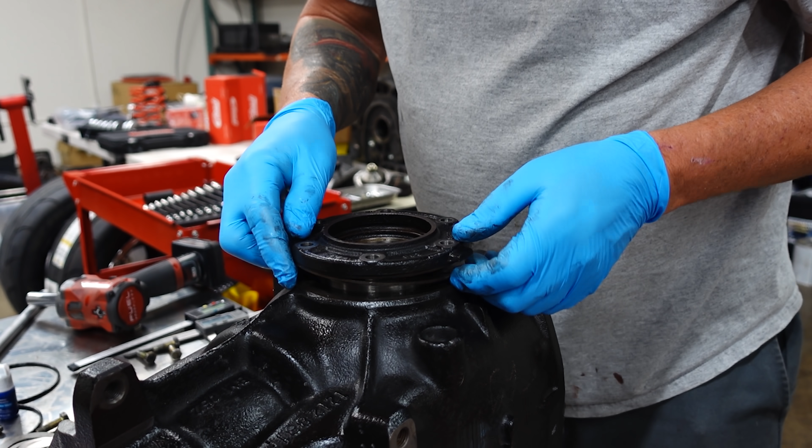You know what he could use there? He could use a shim. No, he could use even more shims.

With only 14 days, 2 weeks until this absolutely insane race, I've got a bit of a conundrum. Thankfully, I've got a solution. This is a steel ring, and it belongs right there.

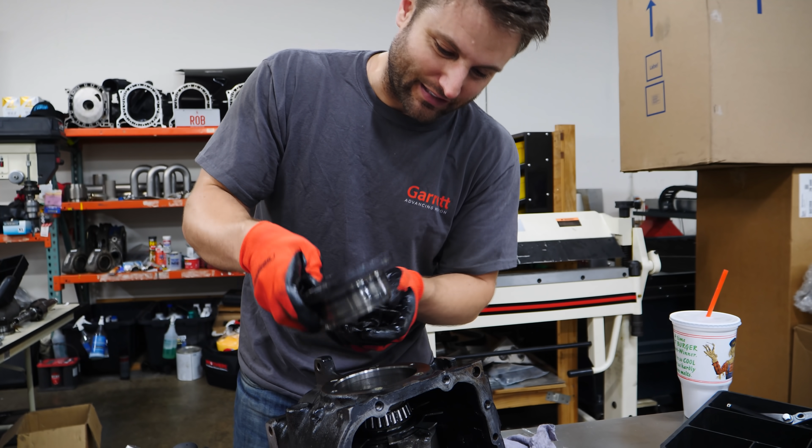These are shims used to position the things inside of the front differential. You're putting pressure on that race, on that bearing. Ooh, look at that. It's a baby.

I made a post online asking if anybody had any BMW shims for this. They didn't, and there's one kit over in like Yugoslavia. I don't even think Yugoslavia is really a country anymore. It's gonna take 2 months, too late.

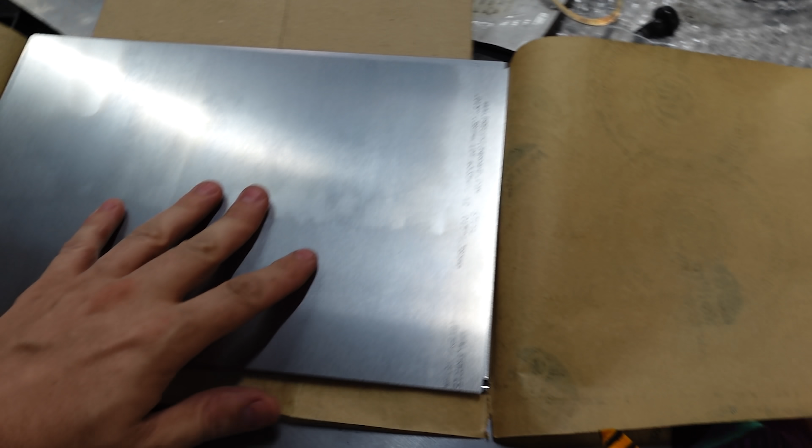So I went out and bought steel shims, just raw material. Slightly thinner, and you can see it's turning into paper as we go. We are going to take all of these and turn them into this.

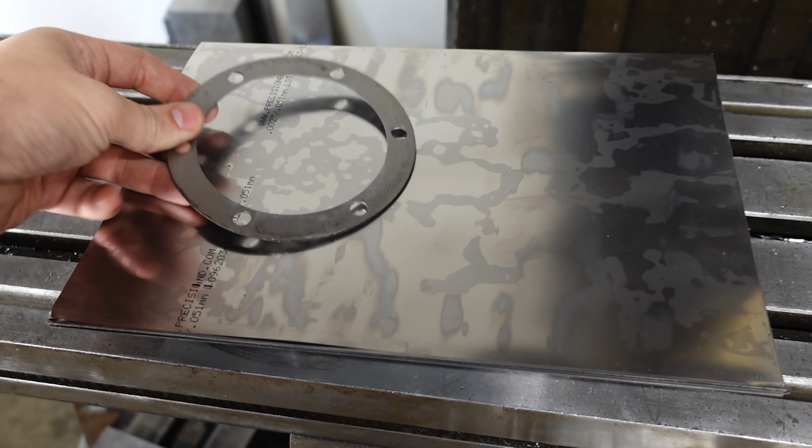I can actually cut all of these in half and make 2 of each. I paid $30, I'm going to use my $30. I mean, I have a $30,000 machine and I'm worried about saving an extra $15. That's why I can afford a $30,000 machine.

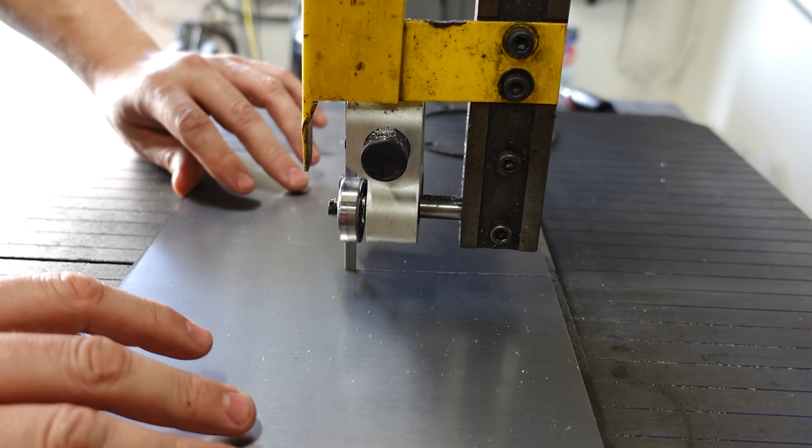I put the really thin ones in the middle. That was just a rough cut, and look at how close I was to the 2 sides being the same width. I'm actually really proud of that. We've got double the number of shims, and they all have plenty of space for me to clamp.

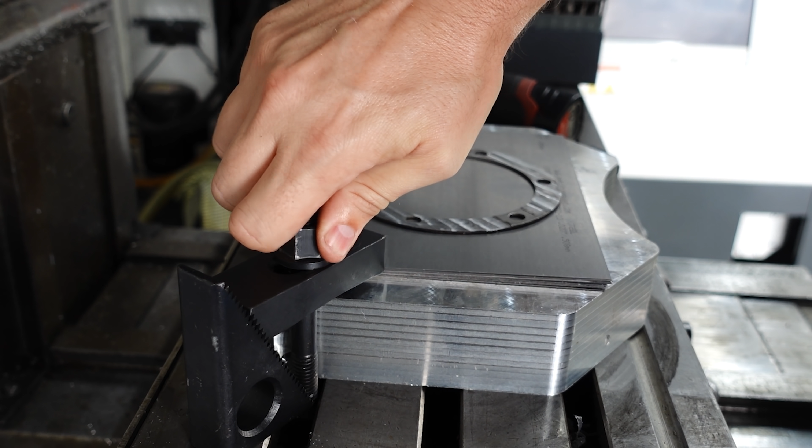Here's where the whole operation gets really interesting. We're gonna drill a hole somewhere in the center. It does not matter, the hole itself starts the process, not the ring. We don't have to set it anywhere.

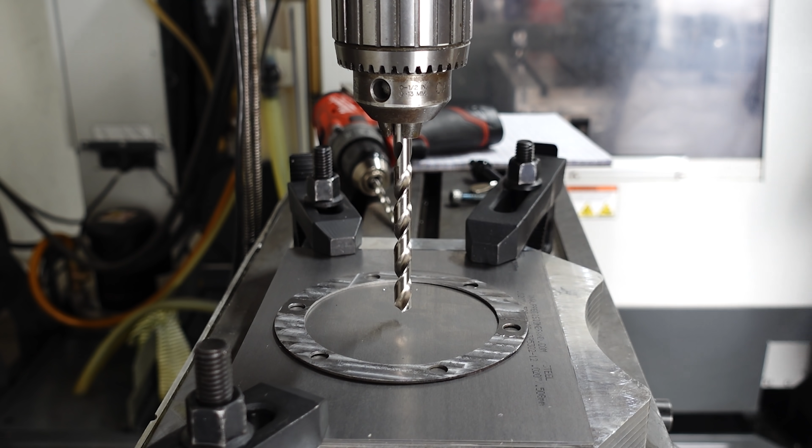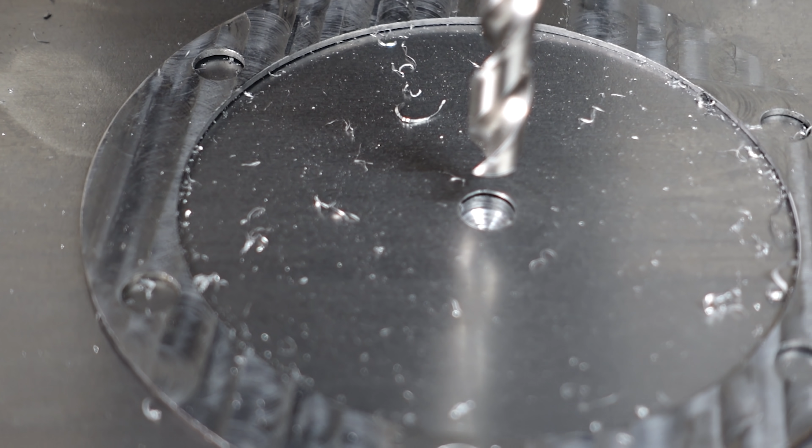So we need to drill the total distance. We will drill basically a cone into the aluminum. That went perfect. There you can see the darker steel and then the lighter aluminum right in that center hole.

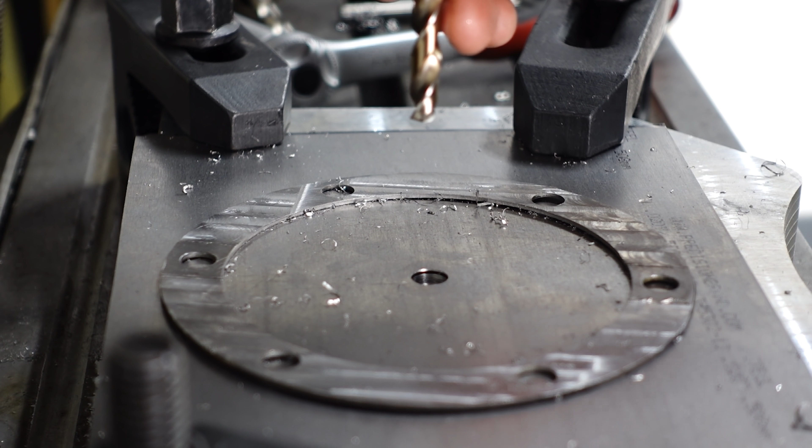For this step, we're actually using a 6.8 millimeter drill bit because we can get these threads really tight without any issue, because it's aluminum, not steel. And it's not in a CNC machine going 7,000 RPM where you catch the bit on fire.

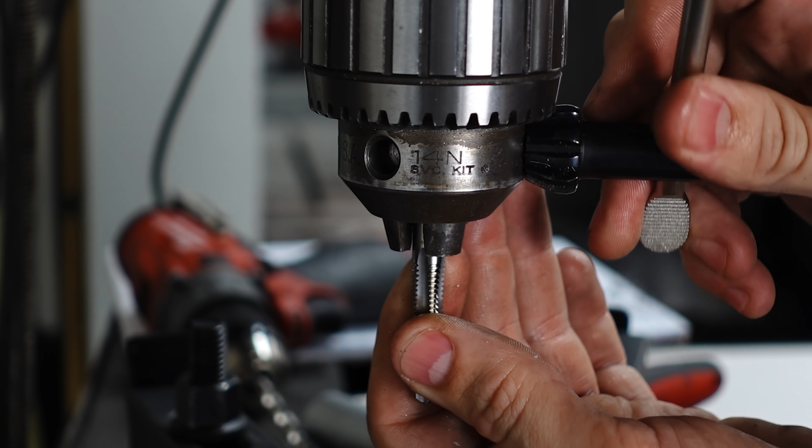This is something I've wanted to do for a while. This is a tap, because this has a quill, so this whole thing can be pulled down by itself. See how it can do that? You can actually use this to tap.

We're gonna go very, very slow, do a couple of rows, figure out where it's gonna go from there. But I'm curious to see how this will work. I wouldn't do this if this wasn't aluminum.

So we'll bring it back out. I cannot believe that worked. Try this.

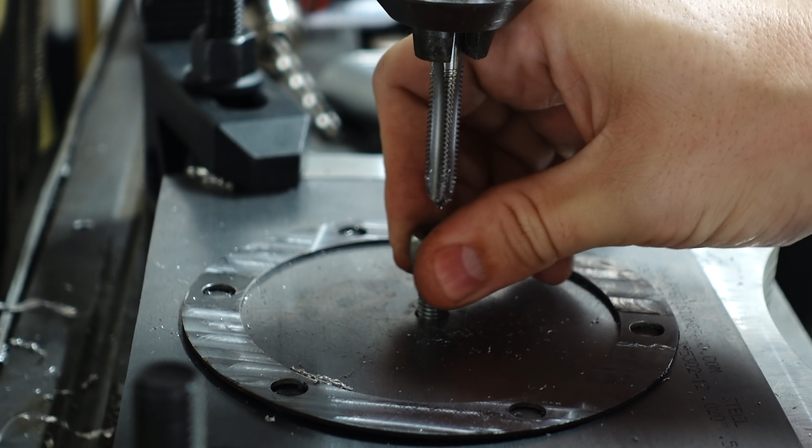That's just amazing. These are the bolts I want to use inside of this because the heads aren't wider than the area we need to cut, which makes working on it easier.

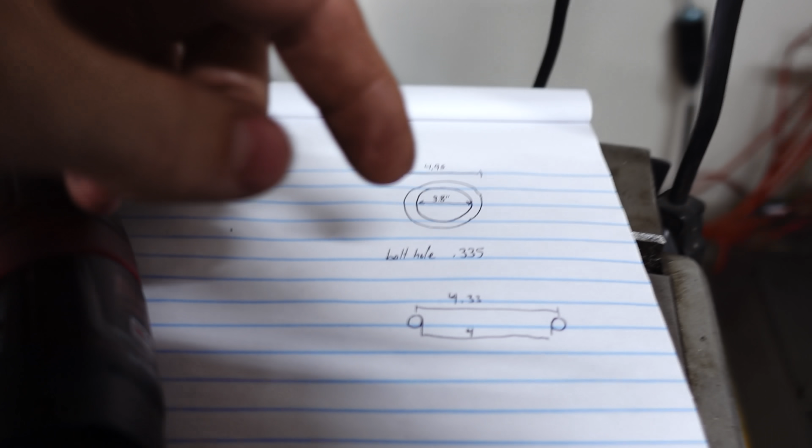So that's done, that's what we'll use to position on the big mill. But also we now know that from center to center of each of the holes, it's 4.33 inches.

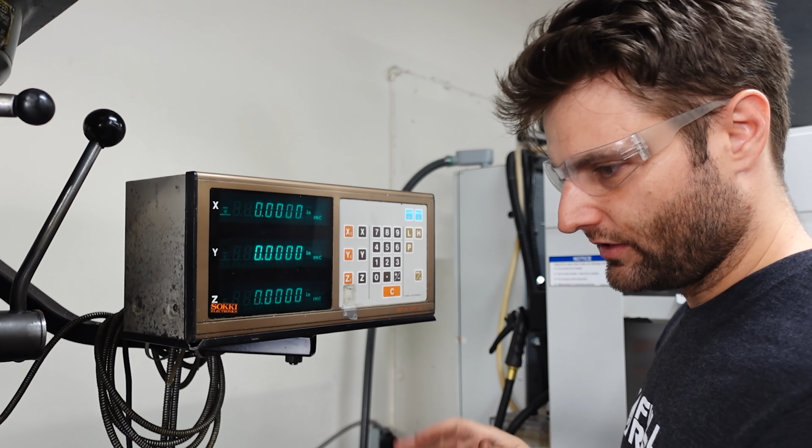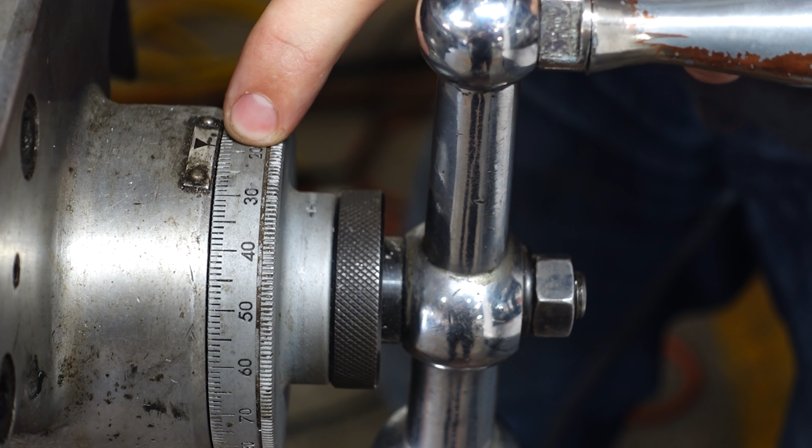So it is centered to the center, and we need to move 2.165 inches either side. So we're gonna have to do it by hand. We're gonna spin this 10 times to get us 2 inches. We're marked at 20, so we're gonna do this 10 times, okay?

1, 2, 3, 4, 5, 6, 7, 8, 9, 10. We need to add the 165 to the 20, so we'll go to 185. Go like that, that's making sense to me.

There we go. Time to swap to the smaller bit.

You guys get to watch how this handle just sinks.

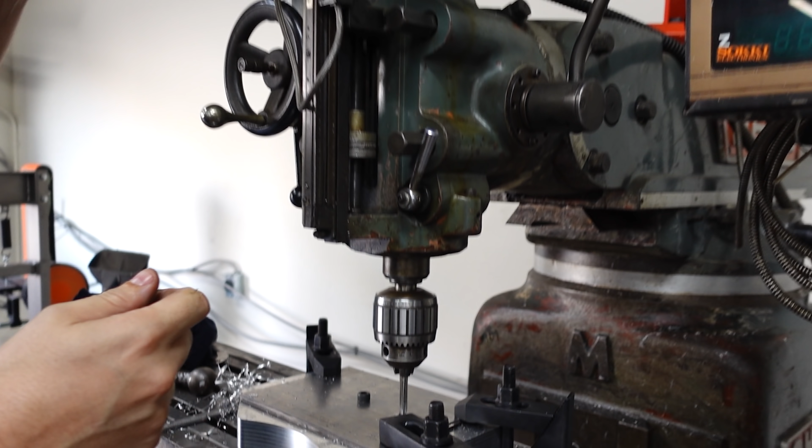It's not an angled tap, so it's not pulling the threads out or pulling the metal out as much as we'd like.

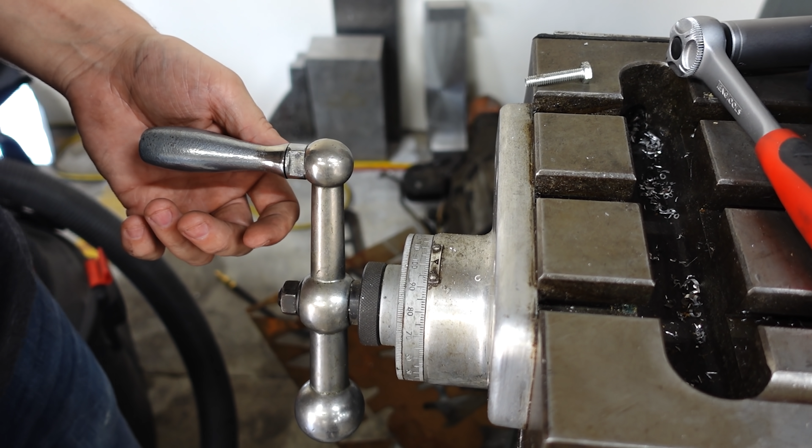10. But here's the real test of my hand jobs.

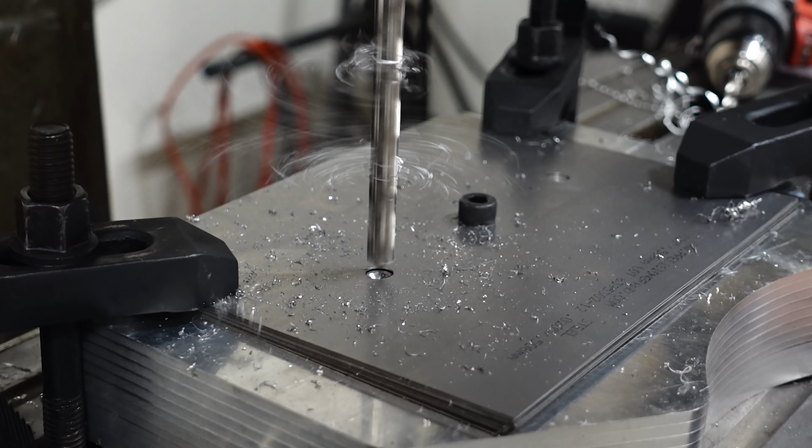I think that's a winner. So doing this on a manual machine is going to make my life a little bit of a living hell.

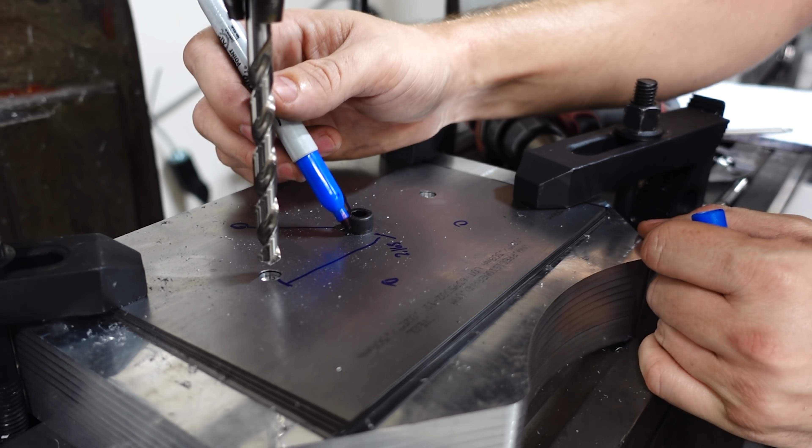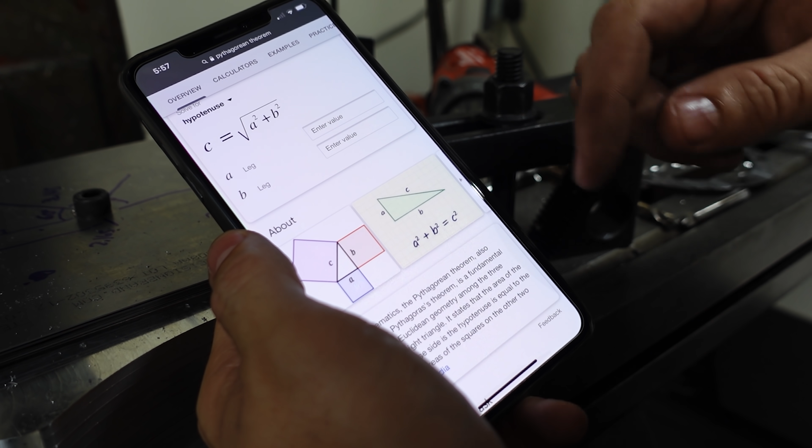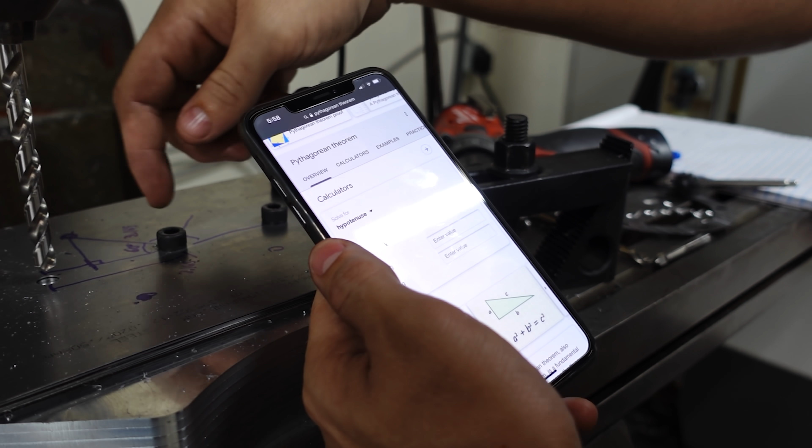Even though this is a circle, it ends up being a triangle. We have to do this, or we can also use sine, cosine, which we will need to do to figure out the heights of these. We're going to cheat - that's the ring that we're going to have to cut with the CNC machine.

It's 2.165, that's where that point's going to be. This is why we're cheating right now. We're simply going to tell it to bring it down, be at a right angle. We just need to move over 1 inch and 83 thousandths, up this way 1 inch 875.

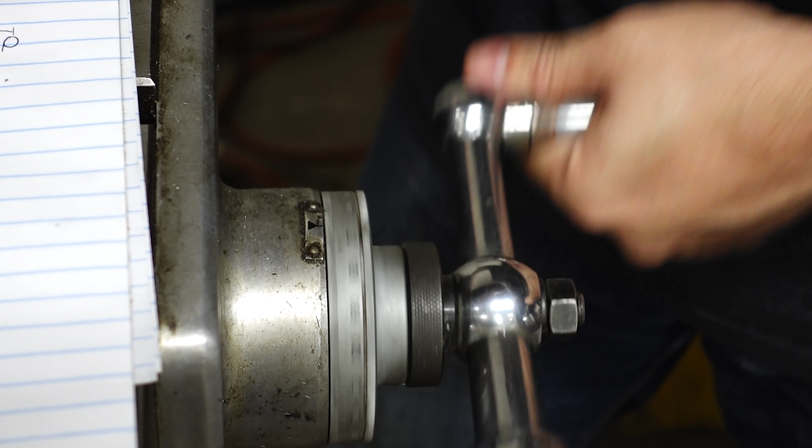1, 2, 3, 4, 5. From those 2 points, that's pretty damn centered. 1, 2, 3, 4, 5, 6, 7, 8, 9. Just roughing it out, 2.161, 2.165 - that's right where it needs to be.

Baby kitty, there's 2 baby kitties. Come here.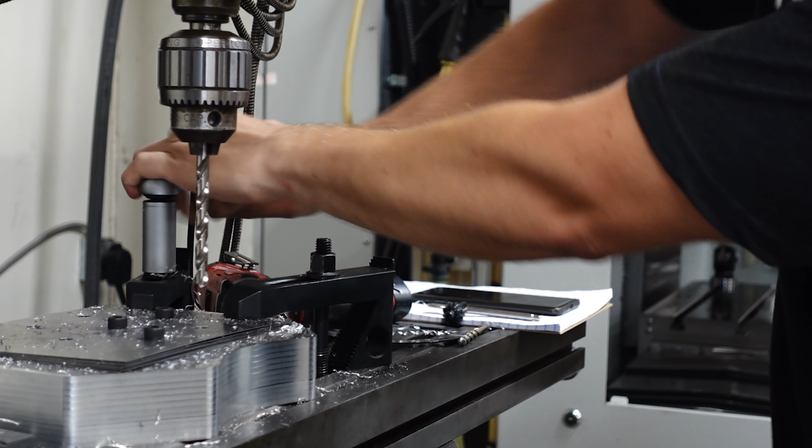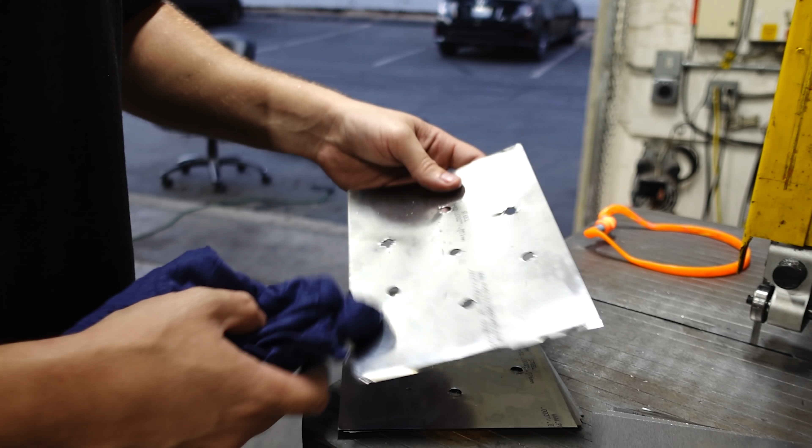Let's see if my holes make sense. The really thin one took a beating - you can see they started to pull through because I didn't have the bolts tightened enough. But I doubt we're going to need 0.002 of an inch.

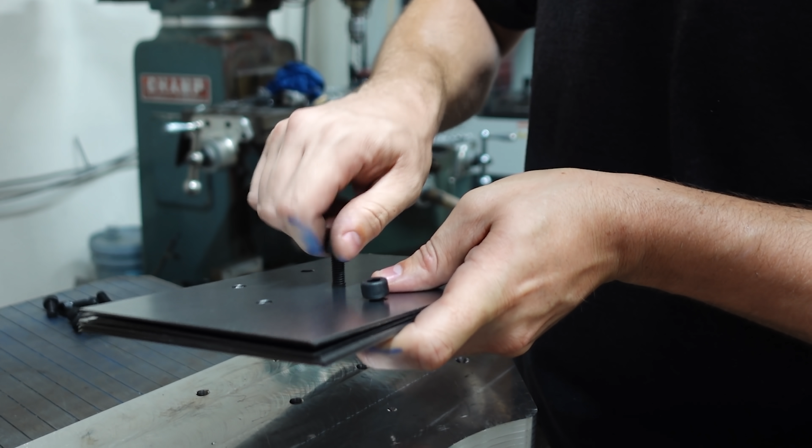The middle one - those threads turned out perfect. We're gonna try just 3.

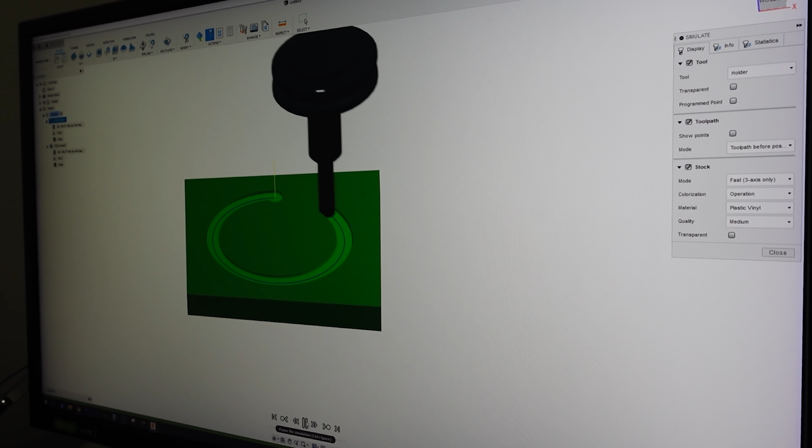This is just straight up a jig to make more BMW shims. This is the next step, a donut. We're actually gonna have the machine go in - I'll show you. So it's gonna go around, go deeper, and because it's steel, we're going very shallow depths. This outside piece is gonna do the same thing.

It's time to use the CNC machine. I am a little nervous, and the reason why isn't the machine itself - it's steel. This will be the first operation I've done that's actually milling steel, not just drilling it.

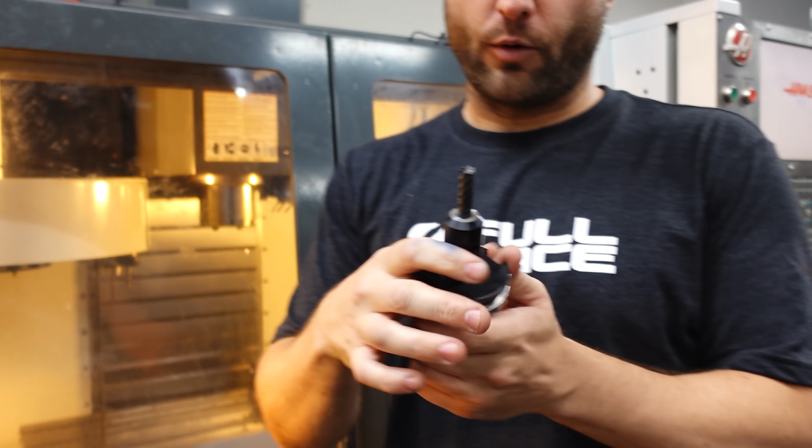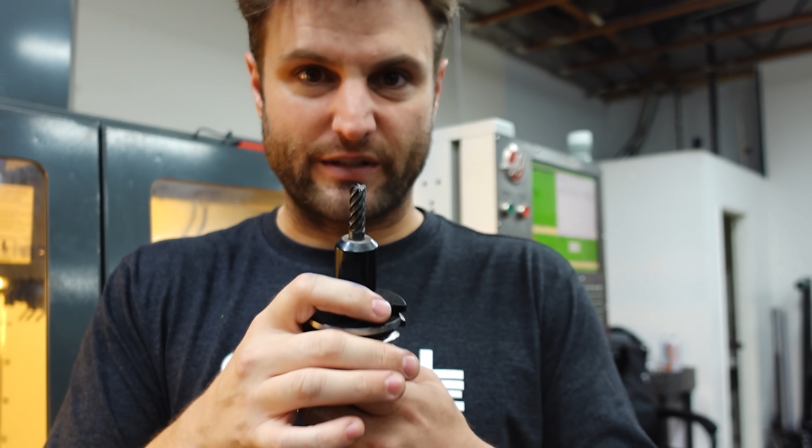We've got this tool here, I'm hoping it's the right tool. We'll find out together - I'm gonna leave whatever happens in. Steel tools tend to have more than just the 2 flutes, as they call them. This has 6. We're gonna go about 1,000 RPM, so very slow, and I looked up how much meat we should basically be taking off per cut. We'll see if that actually works.

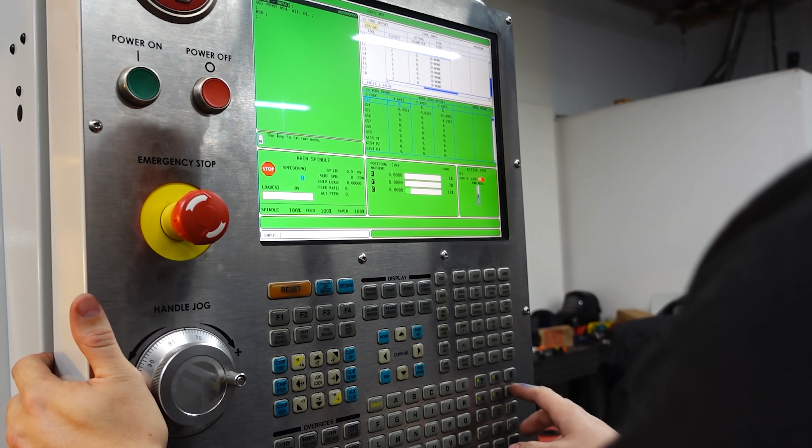We have our newest tool in the system, an end mill, number 4, 6 flutes, length I will say 4.5, diameter I know that's actually 0.37.

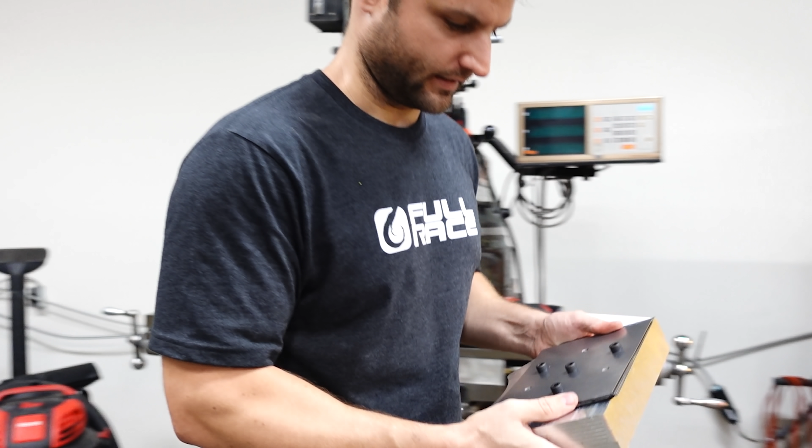Make our little creation here. Doesn't matter where, doesn't matter the rotation, because again these are circles - the only thing that matters is finding the center.

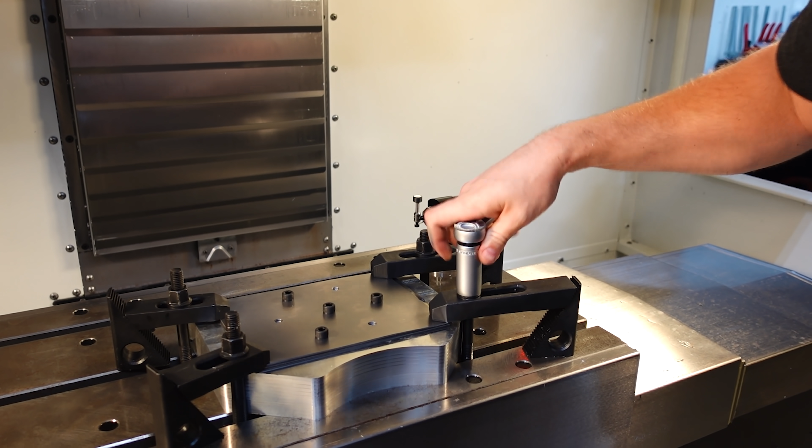Like CNC fail videos, it picks up from here, stays this height, and then clink - just breaks the tool right off. This is pretty much bolted to the table. Take the bolt head out because I don't want the ruby tip here to go into the bolt head and think that it's on the surface and then mess itself up.

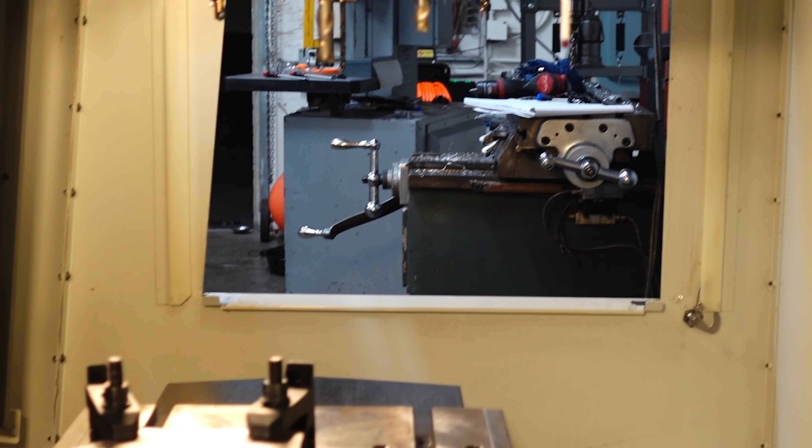We're gonna take these little pegs, fit the tightest one in there, and then tell it to hit there and then measure off of that.

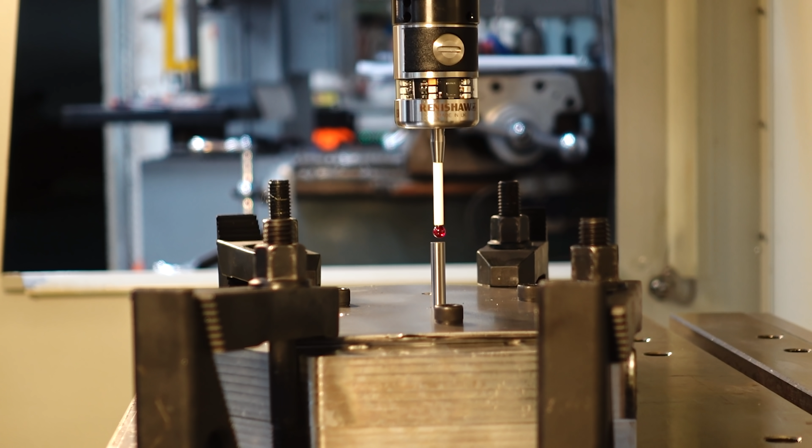That's left, right, forward, and backwards, but not height. We don't want to start cutting from that height.

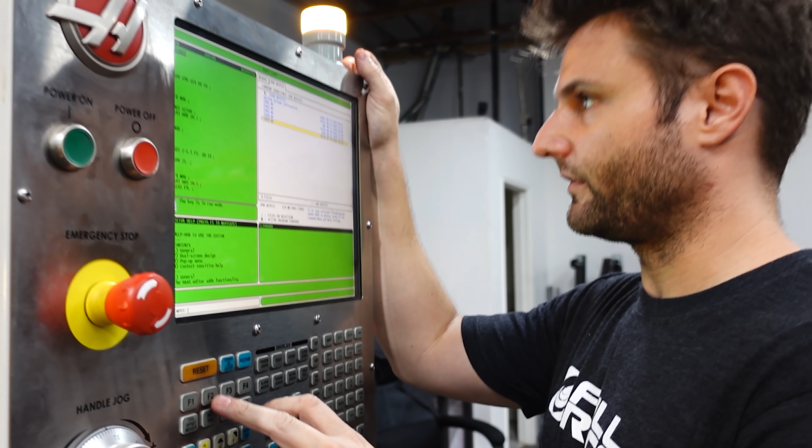We're gonna go put this back in for safekeeping. On here is the secret to it all - it's the code, ready to copy that file to memory.

Now it says grab 211, get the spindle going to 1000 RPM. It's not like matrix code for me yet. This is the first time I've ran CAD from the machine and not written it myself. Okay.

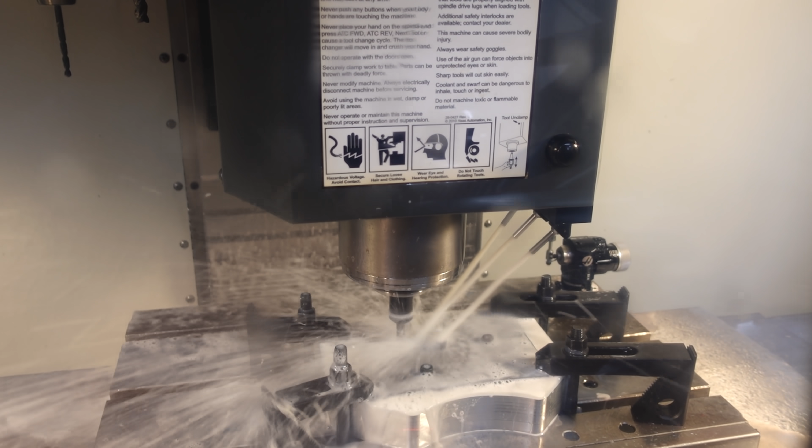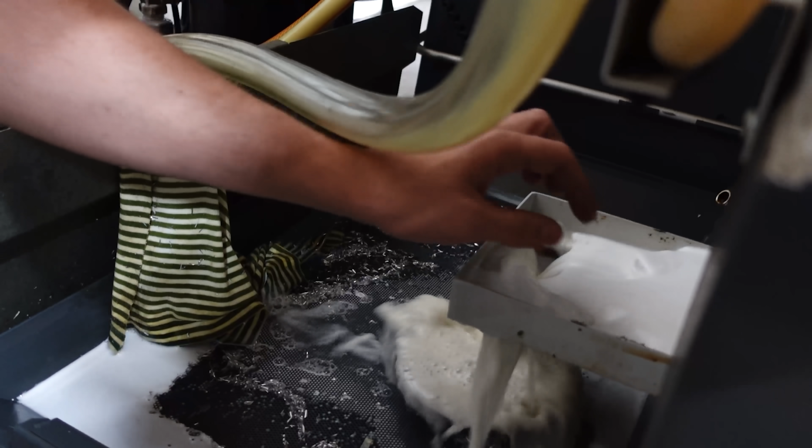I went slow so the tool didn't catch on fire. So far, so good. The coolant coming out of it - I put magnets in here because we're doing steel and it's capturing it.

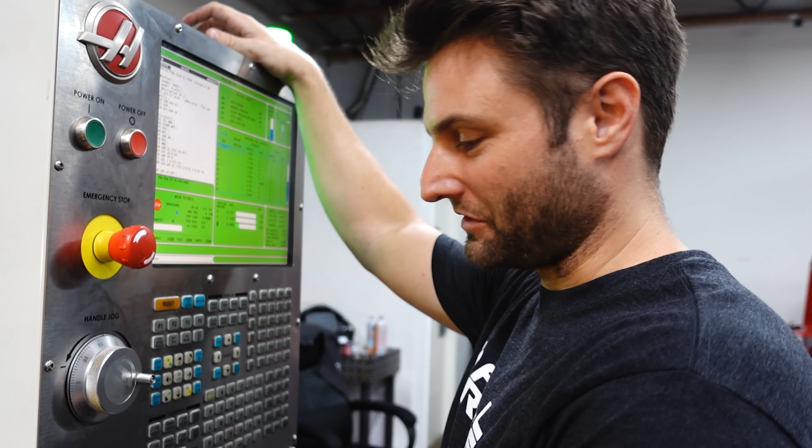It's time to run the second circle. Why did it do that? It went too deep.

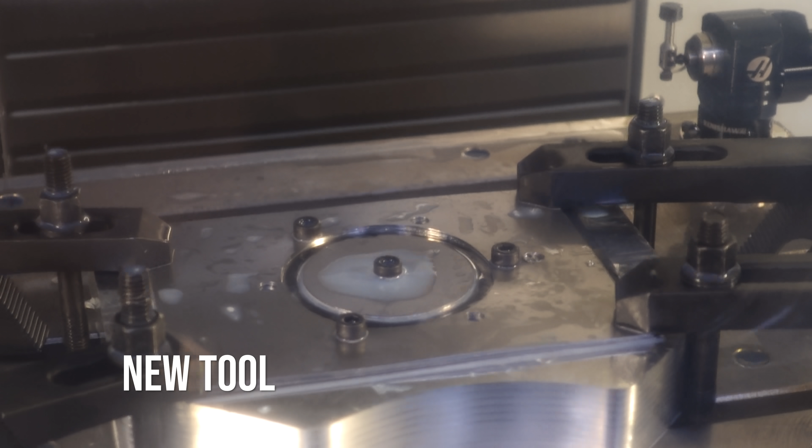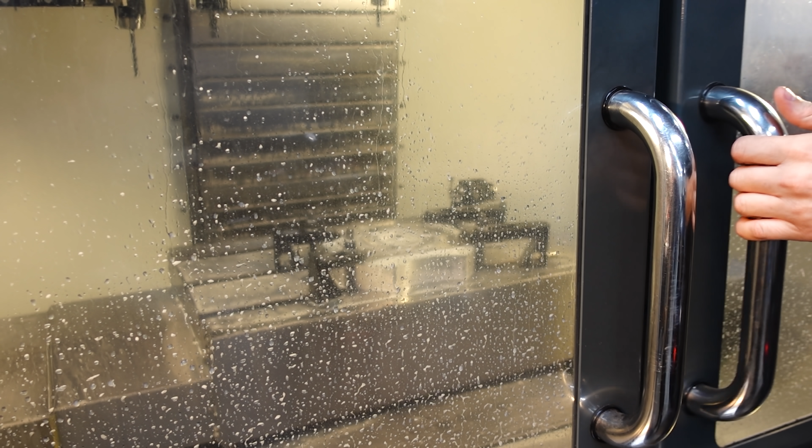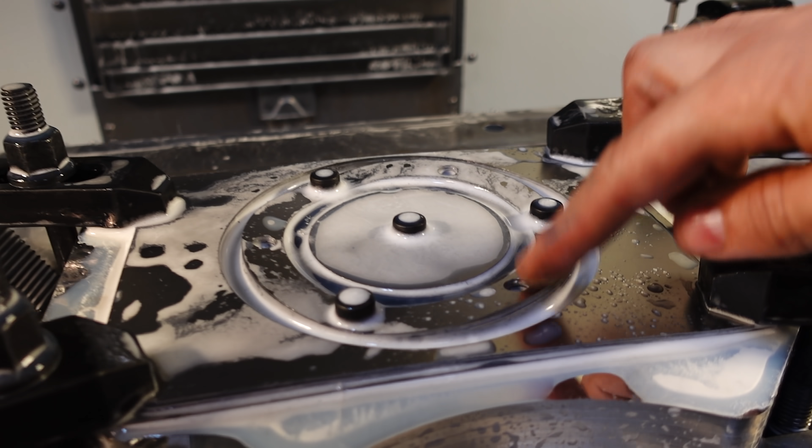Okay, I think it's already going deep enough. Oh yeah, look, you can see it starting to pull up out here. It was starting to do exactly what we were thinking about - we could have definitely bolted these down. I didn't realize it would bend up that much.

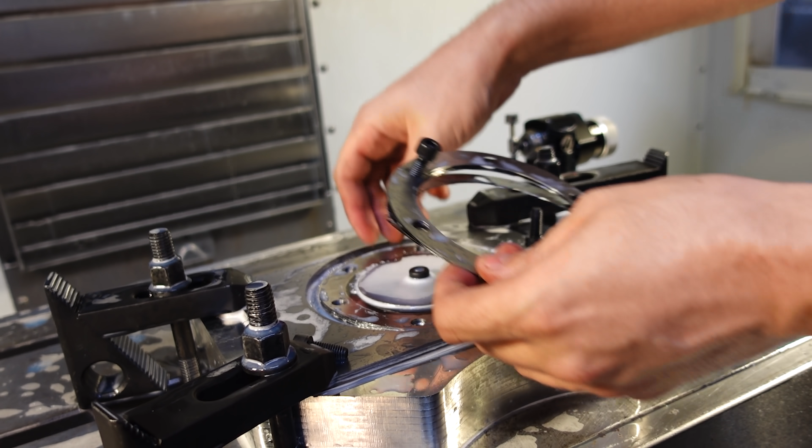Didn't go all the way down on the center hole, so we're gonna take the ones that are good out. Oh yeah, the ones that haven't been machined yet are still stuck to the middle - that makes that easy.

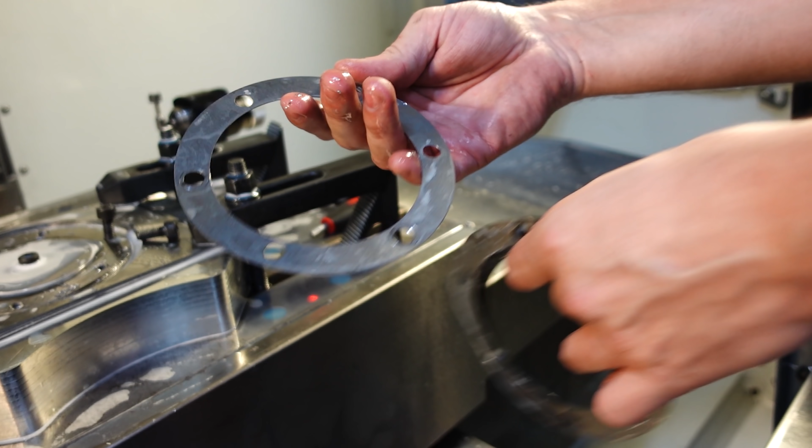Wow, those holes are all dead on. The inner hole is dead on. The outer one's just a slight overshoot, but again that doesn't matter. But here we have quite a few shims just ready to go. That's so exciting.

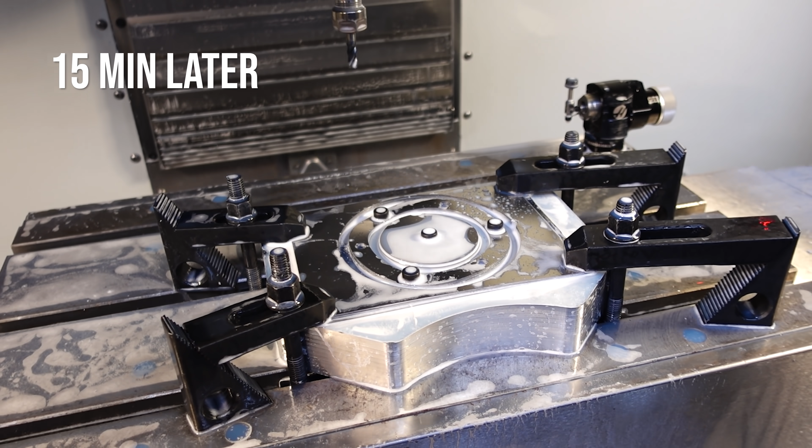Yeah look, that's the aluminum, we went deeper than we needed to. There are all the rest. Anybody need shims? Yeah.

That's how you create parts that don't exist or aren't available in this country in an emergency. You know what he could use there? He could use a shim. Oh wait, you know what? No, he could use even more shims. He's got a lot of options here.